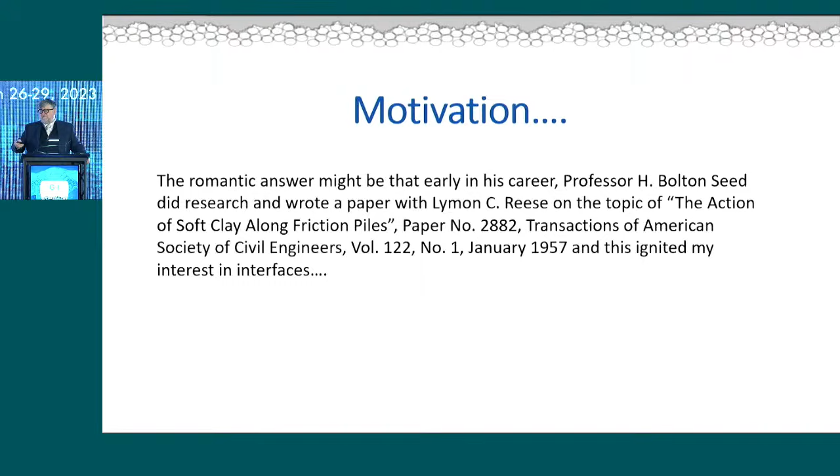But the reality is that in 1986, I took a class with Bob Holtz on geosynthetics. And that's not to say that's a second-tier opportunity, but let me explain. Bob was talking about interface friction, and in class he mentioned that at the interface you could probably get about 65% of the soil friction, which was a good number to use, referencing what was being used in practice.

Being the obnoxious graduate student, I raised my hand and said, 'Professor Holtz, what do you think the maximum we could get out of an interface was?' Bob thought for a little while, then said, 'Well, depending on a number of factors and considerations, maybe we could get 75 or 80%.' At the time, I said, thank you very much. But therein was born the question for me: why the hell can't I get 100%? If I'm an engineer, I surely should be able to get 100%.

Well, of course, there isn't a simple answer to that. Although today, if students ask me what's the most I can get out of an interface, I'll tell you, oh, probably 120%. But the problem is, if I get you 120% at the interface, the failure will move into the soil, so the maximum you can actually get is 100% of the soil. But nonetheless, there's a big difference between accepting 70% or getting 100%, and I think it's important that we stop and think about how we can achieve that.

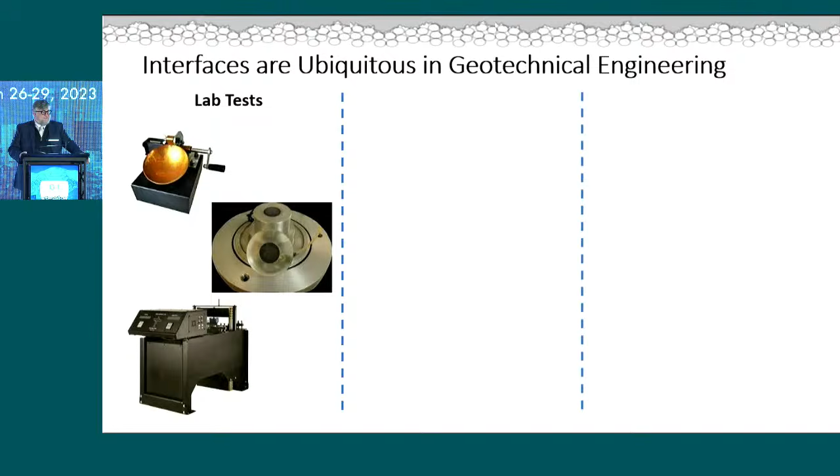If we move to the field, we have things like the cone penetrometer with a smooth sleeve, and I'm sure we'll hear a lot more about cones on Tuesday night with Paul Mayne. But also there's the Iowa borehole shear device, which was specifically designed to try and determine in situ interface friction. And finally, every time we put a soil anchor in the ground, we have to run an interface test, either proof or performance, to assess the pull-out resistance.

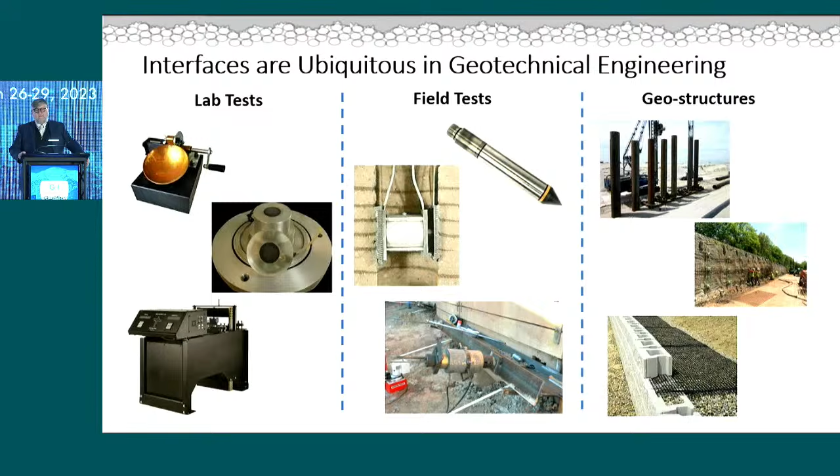And finally, geostructures - as you can see, I've got a pile foundation system, soil nails or other retaining walls, geogrid reinforced soils. All of these involve interfaces, and so it's no exaggeration to say that there isn't any geotechnical project out there that hasn't got multiple interfaces involved somewhere between the lab, the field, the lab-field test, and the actual prototype structure.

Let's move on to some specifics. If I start thinking about idealized single particle geotechnical interfaces, first here is a circular particle on a smooth surface. If you look at the dashed line in the center of the graphic, you can see there's no up or down movement of it. I'd argue that circular particle is quite compatible with the underlying flat surface.

If I go from pure rolling to pure sliding, you'll see it actually looks remarkably similar. Trust me, in the GIF, those particles on the right are not rotating, but the bottom line is there's a similarity between those two.

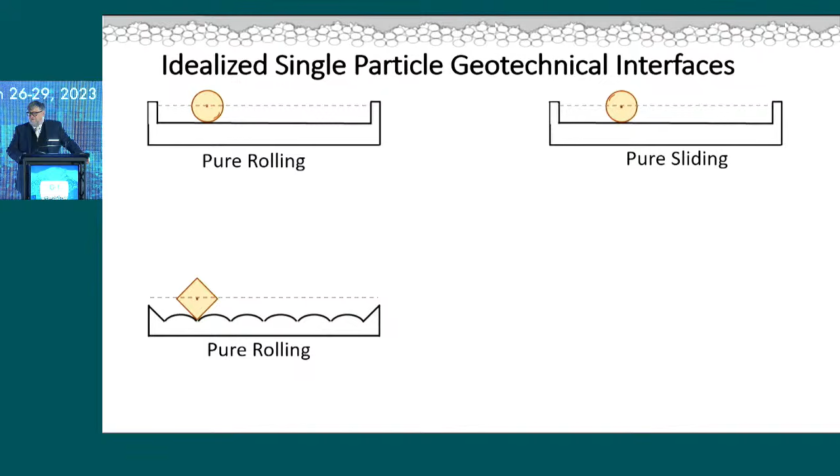If I move on to a square particle, as long as I design a surface for it to roll against—this is the pure rolling case—you can see that centroid line does not deviate up or down. So there is a degree of compatibility there. But if I go to pure sliding, now you can start to see that particle centroid line fluctuates up and down.

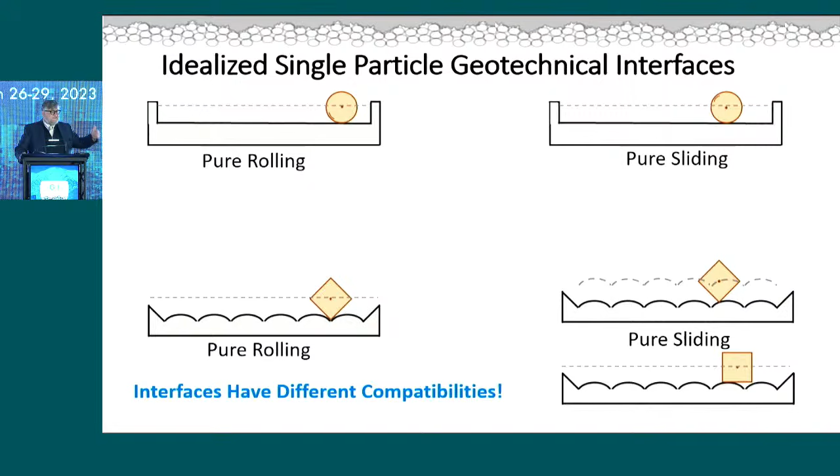However, if I rotate that particle 45 degrees, guess what? I can actually get rid of that, even though it's now a rough surface with a square particle. So the bottom line is all of those single particle idealized systems are clear evidence that interfaces have different compatibilities.

And of course, the reality is that actual geotechnical interfaces fall somewhere in the milieu of all that. There are rotations, there's rolling, there's sliding, they're moving relative to smooth surfaces, relative to textured surfaces. It is really very complex—real interfaces are much more complex than that.

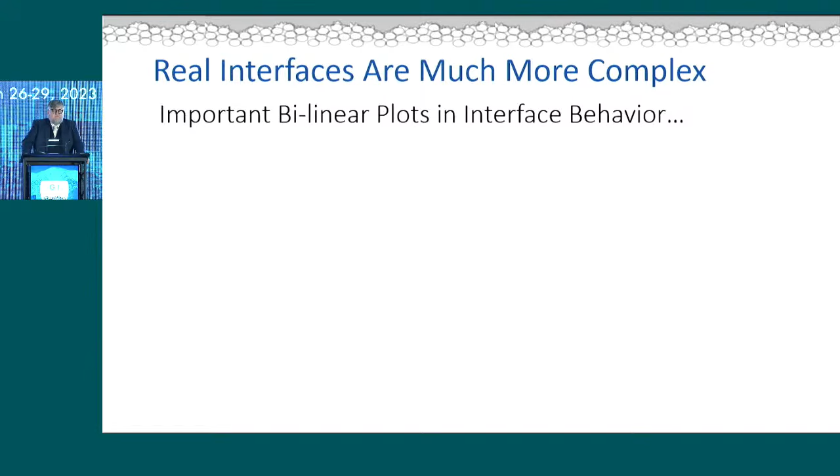There are two important bilinear plots that I always talk to students about when discussing interfaces. The first is research originally presented by Uesugi and Kishida, Japanese scholars in the mid-80s, where they plotted the relationship between coefficient of friction and surface roughness, or normalized surface roughness.

Remember, they are now looking at real systems, so the particles at the interface are not only interacting with the interface, but also with the particles right behind them. So there's a much more rich environment for things to happen.

What was important was that prior to this, interfaces were referred to qualitatively as smooth, slightly rough, and very rough. That made it difficult to extract more out of it. As soon as this was presented, it became clear that quantifying roughness of surfaces is a very important thing to do.

If you start at the left-hand edge of that line, at low normalized roughness, that corresponds to a smooth surface with particles sliding next to it. To be honest, the particles barely know they're moving relative to the smooth surface next to them—aka CPT, smooth friction sleeve. It's a slide-by test. In contrast, as you increase the roughness, you see an increase in friction as a function of normalized roughness up to some value.

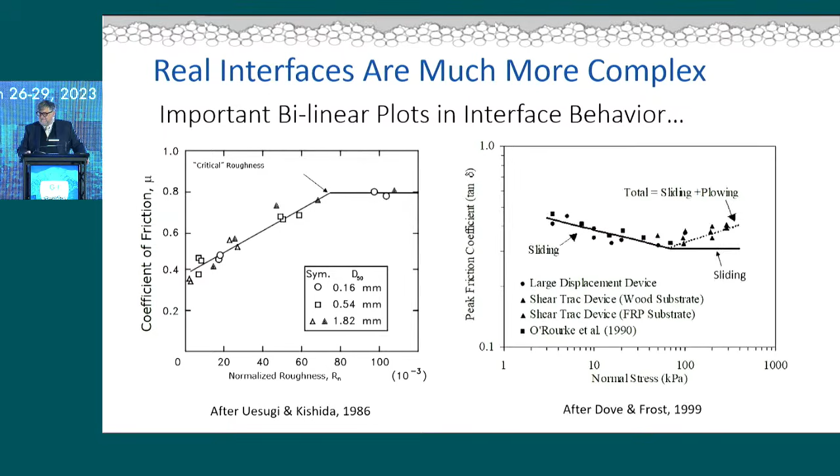At that particular value, you reach a critical roughness where the failure actually moves into the soil, because particles get trapped in the rough surface, and once it's sufficiently rough, it becomes a soil failure system. So the bottom line is, here's where I can argue I can get the 100% rather than the 60 or 65%.

The second bilinear plot, which is also very important, shows the relationship between the log of peak friction coefficient and the log of normal stress. Many of you may have seen this at various stages.

At low normal stresses, you'll have a certain value of peak friction coefficient. As you increase the normal stress, you actually see a decrease in friction, and it continues to decrease. In fact, the slope of that line gives you the exponent of the Hertzian contact law.

What's happening there is that even though the normal stress is going up, the number of particles migrating to that front row is actually increasing. So the contact stresses are going down, up to a certain stress level. Once you get beyond that stress level, one of two interesting things happens.

The right-hand end of that solid line goes horizontal, and what that means is that the front row is filled. There are no more locations for particles there, and the relative hardness of that surface is such that it remains a sliding mechanism.

However, if I have a softer surface, maybe instead of steel, for example, I have a polymer, then what starts to happen is, as I increase the stress, I'm going to find that you get plowing into the surface as your particles are moving relative to it, and if you've got an angular particle, the orientation of that plowing line may grow.

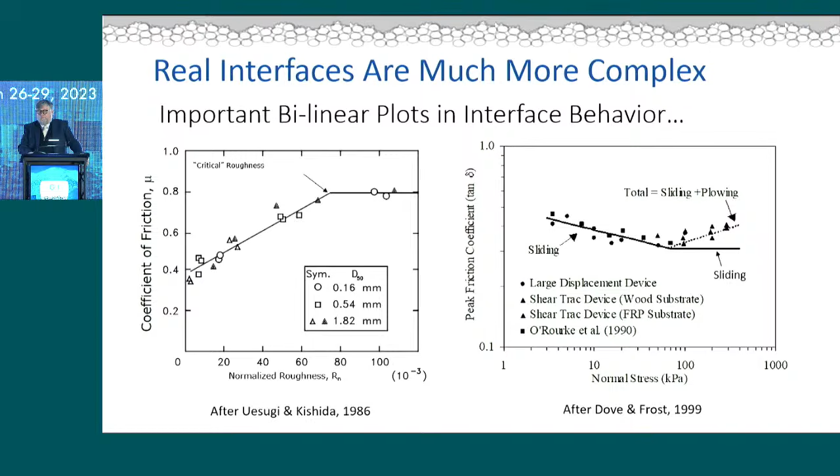So, against all of that and the motivation and the context, the lecture outline: I'm going to talk briefly about some factors enhancing or limiting compatibility. I'm going to give you brief insights from a few past studies, and then I'm going to move on and take a look at some microscale interactions using DEM, some alternative thermal interfaces using coupled FEM.

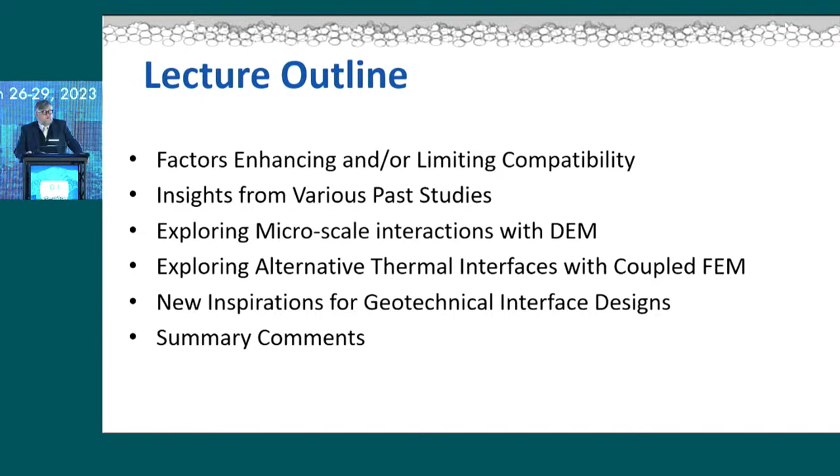Because actually one of the important things is that interfaces is not just about structural performance. Increasingly, thermal performance of interfaces is something that we need to be looking at. And then finally, I'll end up with a few examples of some ongoing and new inspirations for geotechnical interface design.

So, here is a long list of factors that enhance or limit the compatibility of two materials adjacent to each other at an interface. I am not going to talk about all of these because otherwise we'd be going for dinner just in time to get to the Terzaghi lecture, but there is a huge rich field there, and you will have additional information on this in the written version when I get to that.

However, I will say that over the years, as we've been studying interfaces, we have picked off just about every one of these through a particular study to try and understand how important that is. Some are more important, some are not so important. That's good. All are relevant.

More importantly, as I stand here today, I cannot tell you if them being more compatible or less compatible is always good. And you'll see that from some of the examples that I give. It might be nice to think that if I make it more compatible, it'll be better. But that, from an engineering point of view, may not be what we actually want to get to.

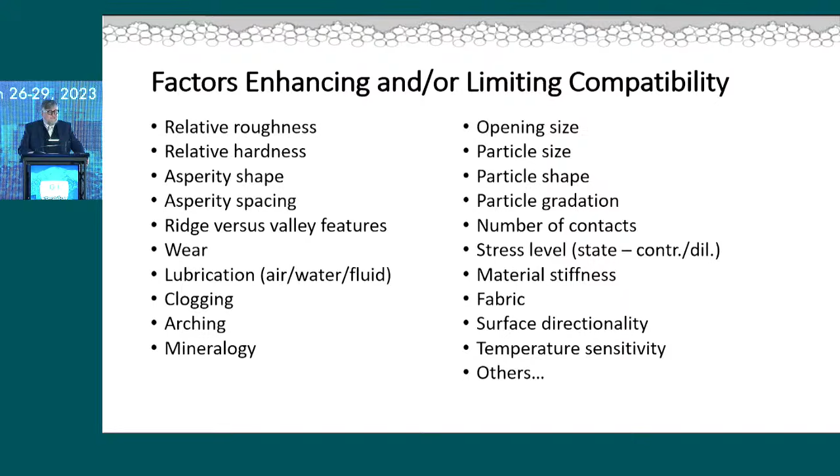So, looking at some insights, I've already mentioned the multi-friction sleeve penetrometer that we developed a number of years ago. We didn't want to fight with the CPT people, so instead we added an attachment with 4 smooth friction sleeves behind it. That was the first embodiment of the apparatus.

When we pushed it into the ground, this had 4 smooth sleeves, sequential, one above the other. But if you actually look at the friction sleeve stress versus depth, it essentially looks like there's only one line there. That's because even though it's a staged test, the fact that you had another smooth sleeve following the first one made no difference to the soil. It hadn't been affected by the first one. So whatever response you got from the first one, you got the same from the second, the third, and the fourth.

In contrast, when we put a sequence of sleeves going from smooth to sleeves with increasing roughness, now you can see that we actually generated different friction sleeve profiles versus depth.

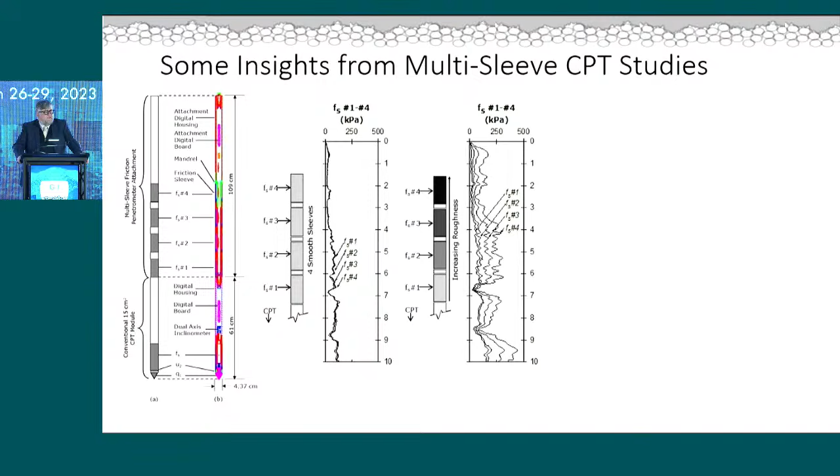I'm glossing over lots of details here, but this early work was the work of Jason DeJong's PhD, for example, and we spent many, many months looking at patterns so that we could avoid clogging, for example, with these sleeves.

Here's an image of just some of those different sleeves that we used, and you can see that there are smooth sleeves there, but there are some with textures of different magnitude or different roughness.

And in fact, we also did tests where we only put textures on a small portion of the sleeve, and no surprise, you didn't need the full-length sleeve in order to get the same measurement of friction, because the only reason the sleeve length is the length it is, is that's what was originally needed in order to have enough space to put all the electronics 50 years ago, 60 years ago.

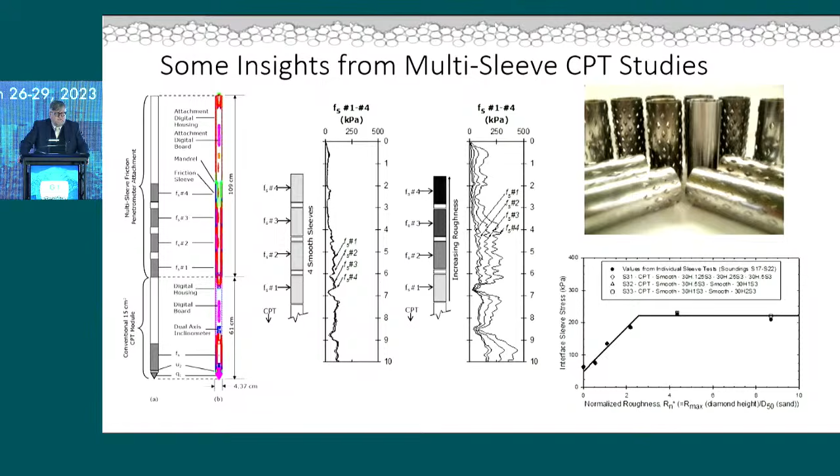So that became very useful. Probably most importantly is this was the bilinear plot that we generated, not in the lab, but in the field. And so with a single sounding, you could actually generate this bilinear relationship in the field, showing the relationship between interface friction or shear stress and normalized roughness.

Other studies we did in the lab looked at what is happening at the particle level as we move away from the surface of the sleeve. In the upper plot, the sleeve is in a vertical direction, with an image showing sand particles to the side. We made detailed measurements of the void ratio, and the line in the lower plot shows the as-prepared void ratio as a function of distance from the sleeve face. We've also plotted E-min and E-max for this particular sand for reference.

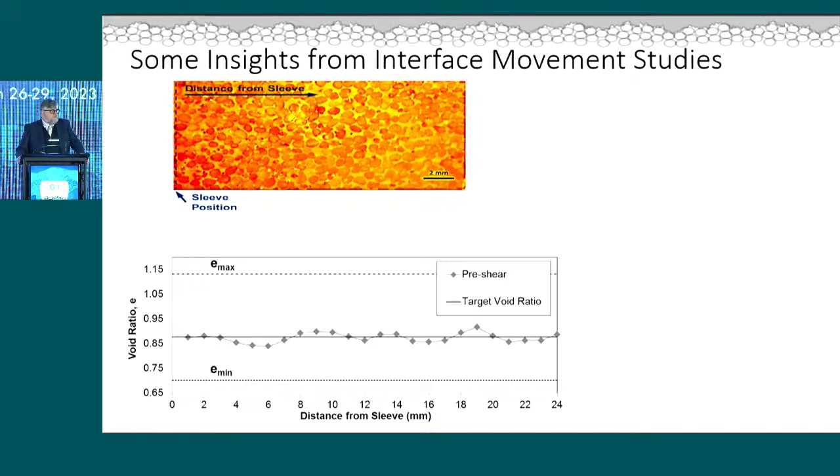This would have been a pre-shear condition. When we sheared the sand particles, this is what we found: close to the sleeve, up to about 4 millimeters, we actually had dilation. Outside that, for probably the next 4 or 5 millimeters, we had slight contraction, and then essentially we went back to the original condition. So there was this zone of initial dilation, then mild contraction, and beyond that the sand was unaware of what was happening in the system.

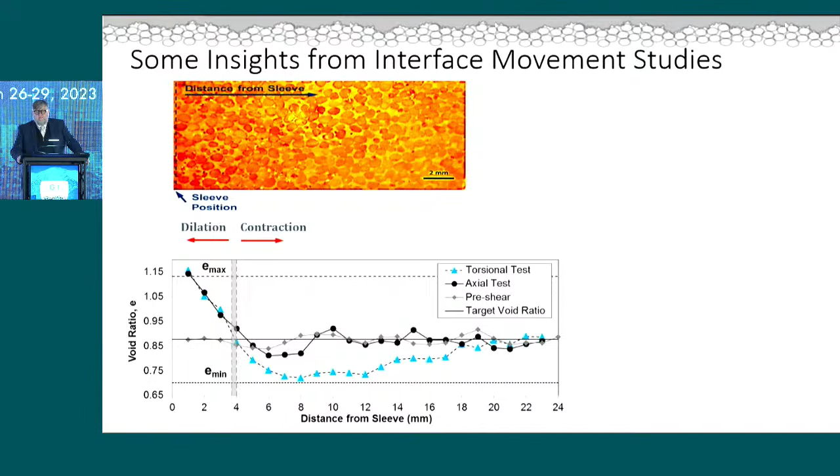When, instead of moving the sleeve axially, we rotated it torsionally, we found the blue line. The dilation was still similar in the same region, but now there was a much larger zone outside the sleeve where we were getting contraction, in fact significant contraction.

We complemented these experiments with discrete element modeling - this was the PhD work of Alejandro Martinez. The particle movements, depending on whether you're moving the sleeve axially or torsionally, are completely different. In one case they stay very close to the sleeve, whereas in the other they're thrown off in tangential directions, which has an effect on performance.

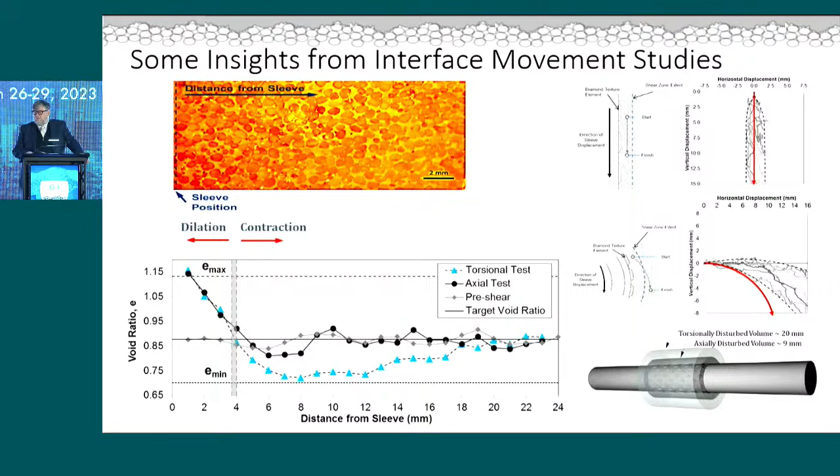It also has opportunity. If you think about the implications, for example for piles, based on the installation method you may be able to get superior performance. Finally, this graphic shows the relative differences in the volume of soil involved for the same sleeve, the same sand, just by changing the direction of relative movement.

We've also done work with shear bands, and you might ask why shear bands, aren't we talking about interfaces? Well, a shear band is actually two interfaces back to back with the same material properties on both sides of the interface. In a biaxial shear test, we captured specimens.

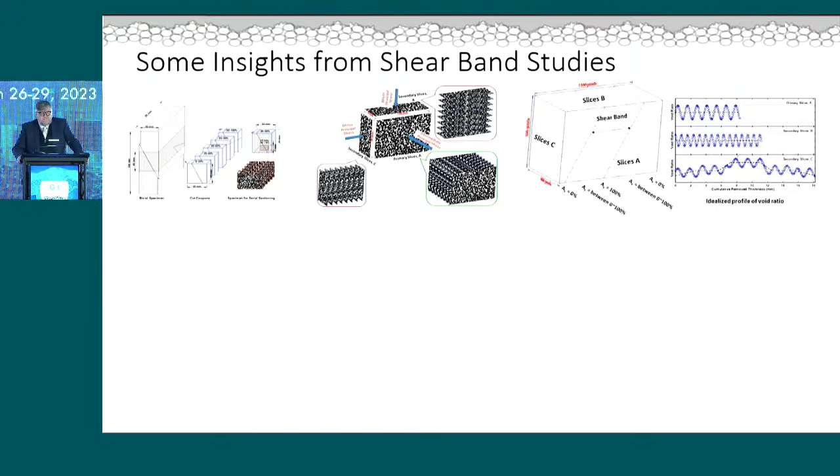We then used resin impregnation and image processing to generate slices from the specimens we captured. We had this concept that depending on where we captured the slices relative to a particular cube - I'm showing a schematic with a shear band diagonally across it - for surfaces on what I call the A or B faces, the front face or the top face, there's always the same proportion of soil within the shear band as well as outside it. So while I may get some local fluctuations in void ratio in the slices, I shouldn't see much difference.

In contrast, for the C slices, if I start at one end and slice through it, there clearly seems to be some kind of signature, because the percentage of those slices that are initially not in a shear band, then partially, then fully, then partially, then not in a shear band, varies as you go from one end of the specimen to the other.

Here are the results, for an unsheared biaxial specimen. While there's a little fluctuation in the early part of the A sample, the rest essentially fluctuate above and below the median line, as we had hypothesized. I also put to scale the circle showing the particle size used here. One thing that emerged was the recognition that if you have a relatively uniform sand, the void ratio structure that emerges, even over a large representative volume, is going to be influenced by the presence of those particles and their diameters.

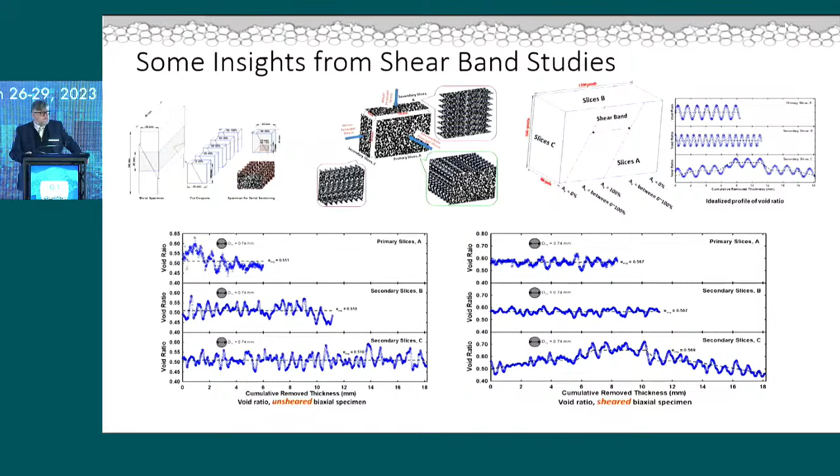We repeated the exercise for a sand sample after shearing, and while there's obviously more natural fluctuation, the results actually mirror the hypothesis we had shown. The bottom line is that this showed us how there are other measures of what's happening adjacent to or in shear bands that are important for us to take advantage of.

Moving on to geosynthetics interface testing - again there were multiple PhDs who did work over the years, so I'm just going to show a couple. This is three different geomembranes and the same geotextile.

Everything else was the same, the normal stress, everything else. I've referenced these as smooth, slightly textured, and moderately to heavily textured geomembranes. You can see that the backbones, the curves, the initial early parts of the curves mirror each other, but there's a different peak strength and a different post-peak response as a function of the texturing of the geomembrane.

In contrast, if I use the same geomembrane, and I don't mean repeat test, I'm still using virgin geomembranes, but of the same geomembrane and a different geotextile, now you can see there's a big difference both in the peak strength and in the strain or displacement at peak strength. So again, there's an important relationship on the other side. It's not just about the roughness of the geomembrane, it's also about the unit weight of the geotextile, how thick the geotextile is, and so on.

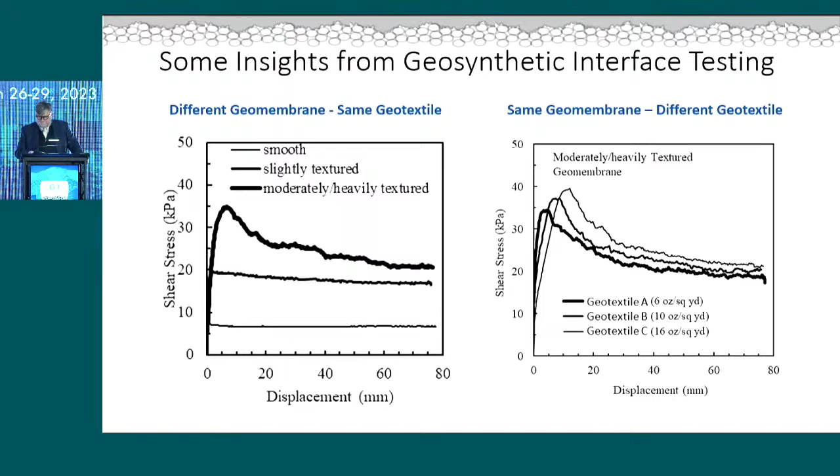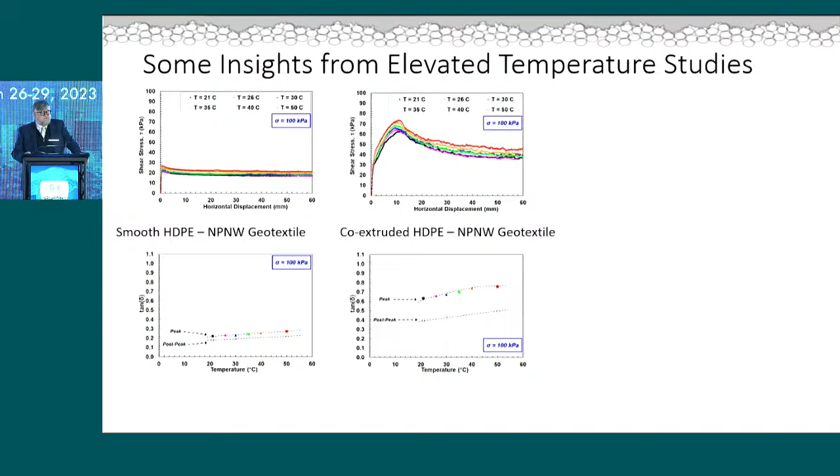Lastly, with respect to geomembranes, we've done a lot of testing at elevated temperatures, because a lot of times we only test at room temperature in the lab, but then we put these into liners in landfills where the temperature may go up to 65 degrees, so we were interested in the effect of that. We did it with many different types of geomembranes, typically against a needle punch non-woven geotextile. The one on the left is smooth, the one in the middle is co-extruded, and the one on the right is structured HDPE. Other than that, everything in all these tests was similar, and you can see there are dramatically different stress-strain curves for those interfaces.

The other thing that's quite fascinating is that if you look at the post-peak portions of the structured HDPE, you can actually see a periodicity emerge. That's reflecting the actual interactions between, for example, the spikes on that structured geomembrane and the geotextile.

One of the nice things about testing geotextiles is that you see the same behavior as you do with sands, but it's actually much nicer because, first of all, the particles are the same diameter, maybe 35 micron filaments, and they're long, but you have many more contacts, many more points of contact as well. So you actually get much richer, much nicer curves when you do those tests.

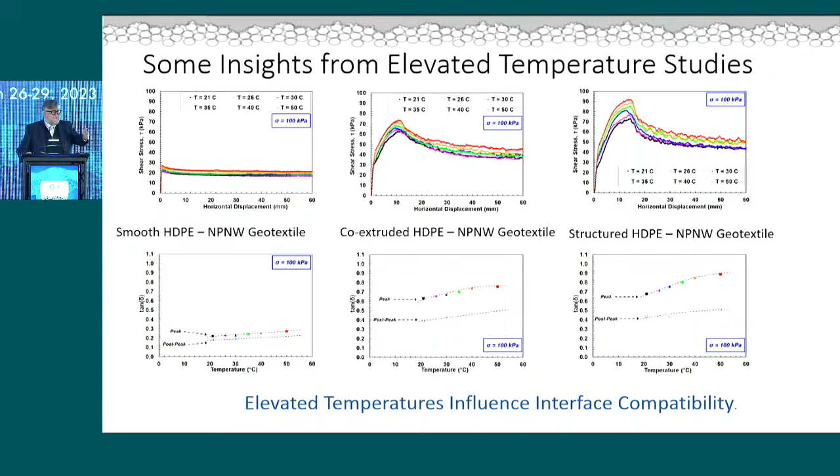So again, I'll make the argument that elevated temperatures influence the interface compatibility. Now, the good news here was that with higher temperature, you're getting higher strength. So you don't need to worry about the landfill you designed with a friction value based on room temperature. I'm not making any comment about what happens if you put the liner in Canada and haven't tested it at 0 degrees.

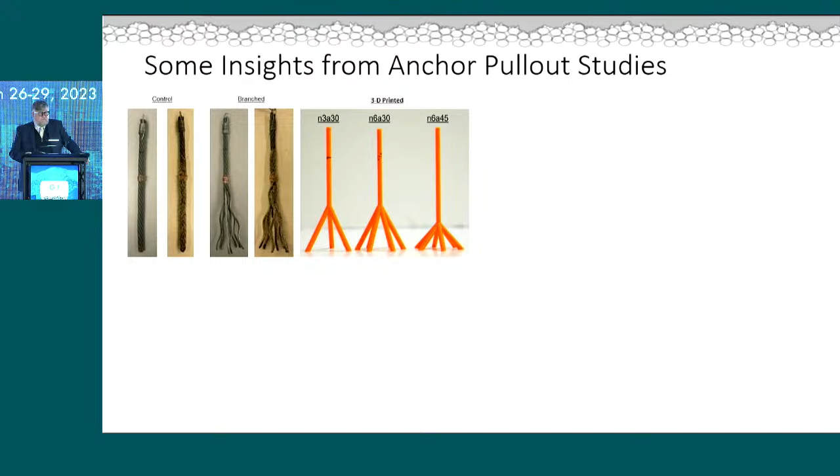We also have done studies looking at anchors and pull-out studies. We looked at both fairly rudimentary control and branched, but then we started 3D printing branches as well. We did pull-out tests both at lab scale but also in a CT so that we could actually see what was happening around the specimens.

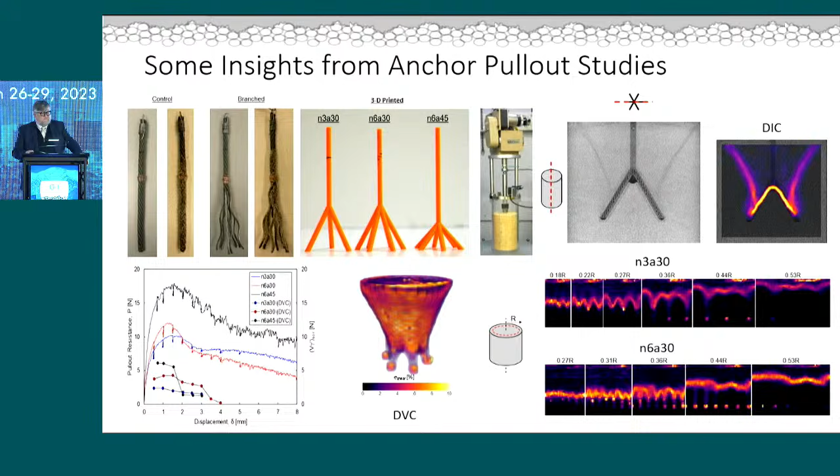One of the reasons I wanted to show this is that by looking at those images from the DVC, represented in the plots in the lower right here, the upper one is a 3-branch at 30 degree, and the lower one is a 6-branch at 30 degree. You can actually see how arching varies as you go from the near radius to the further out radius. So arching is an important factor in interfaces that we need to take care of.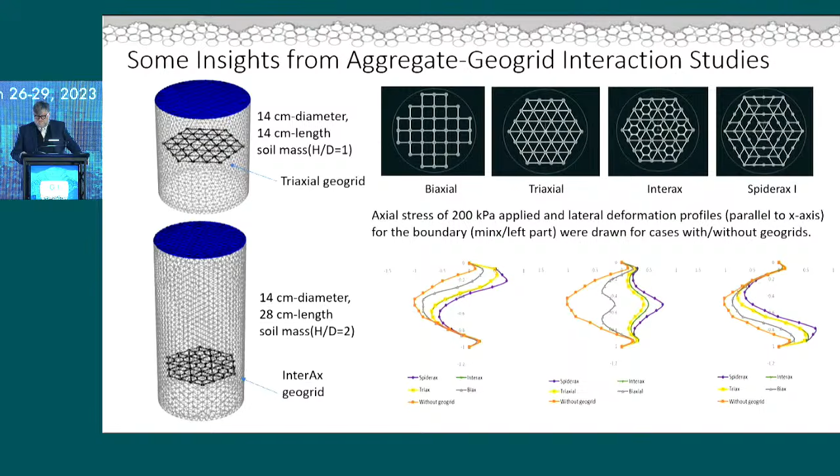Whereas the others show the different geogrids and the different relative performance. The important thing here is that keeping everything else the same but changing the geogrid, you're going to get a different interface friction response in this system, and I think we need to pay more attention to what we're doing there.

So then, as a result of that, I'm just going to spend a few minutes looking at some what I'll call microscale aggregate geogrid interactions. So this is a schematic of work that we've been doing. Rod Barela is the PhD who's been doing that. By the way, I should have mentioned the previous geogrid work was done by several students, Andres Peralta and Janda Schoner. So many of them are in the audience, and I wouldn't be up here with the opportunity to present this wonderful research without their help.

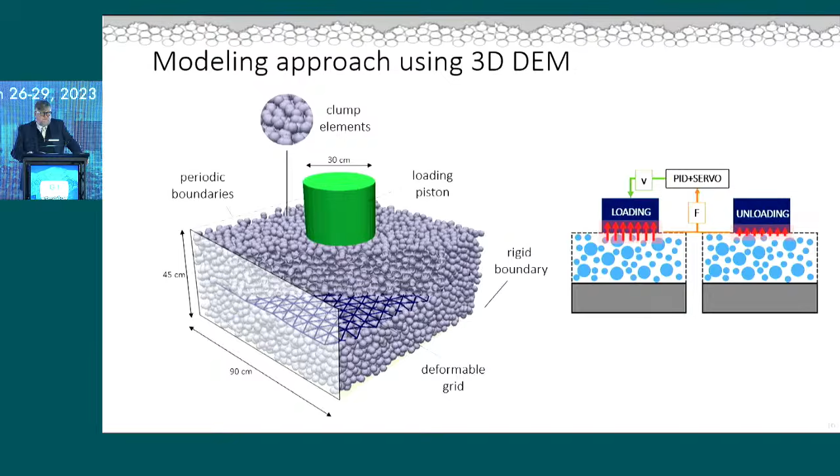In this particular case, we were doing 3D clumps using YADE. You can see the geogrid in the middle of the specimen there, and we did cyclic loading of the specimen. For the part that I want to present to you today, we looked at 3 different configurations. On the left is a sample that is unreinforced, and the concept was that would be likely the one that would give us the largest rutting or the maximum deformations in the system and so on.

In the middle, we have maybe what I might call a conventional geogrid situation where, irrespective of whatever the in-plan structure the geogrid is, that's what we're currently using. And then on the right was a very interesting approach that Rod came up with, which was to actually, within the DEM, restrict lateral translation of the particles in a certain zone. That was intended to sort of give you a lower bound to what deformation you might still expect to see. You couldn't get less than that.

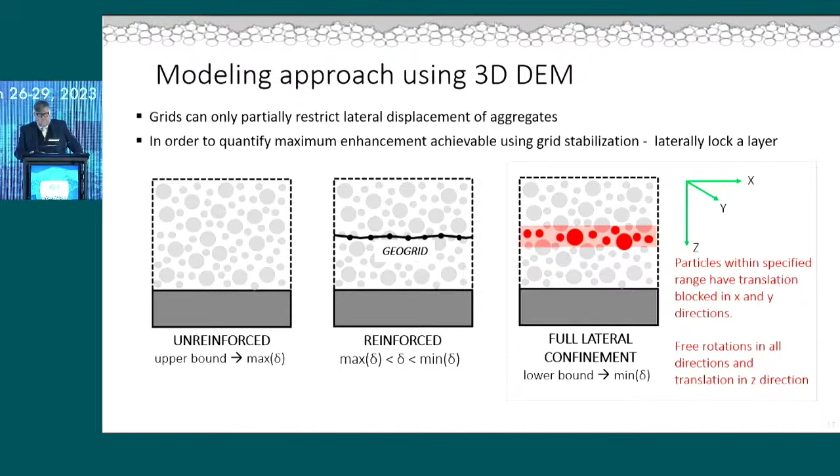And so we did simulations with all of those. Here are the DEM force chains. On the left, you can see the unreinforced, and for those of you who use a 2-to-1 stress distribution, that might give you a little bit of comfort. But you can see that in the middle, where the presence of the geogrid is obvious there, you can clearly see how there's a pinching in of the deformations there.

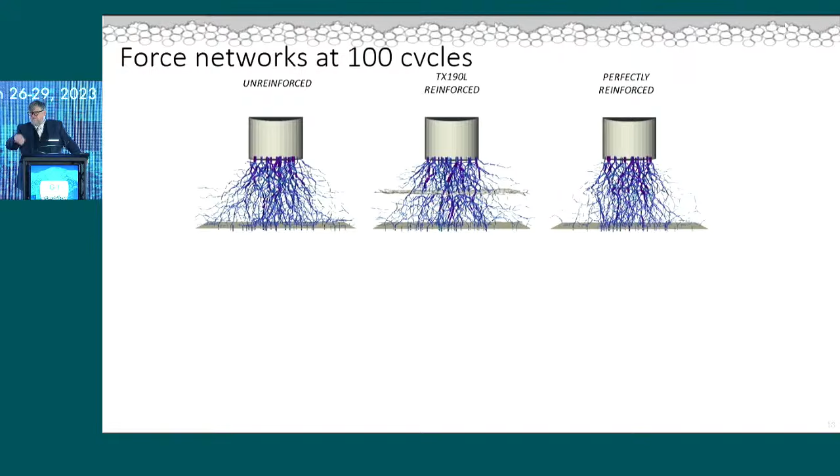Now remember, in all these cases, you're not restricting vertical deformation. What you're doing is trying to provide lateral confinement at a particular elevation. And then on the right is the one that we would call perfectly reinforced. Again, we're not restricting vertical deformation, so that's why you still see force chains below where that zone was, but that becomes important.

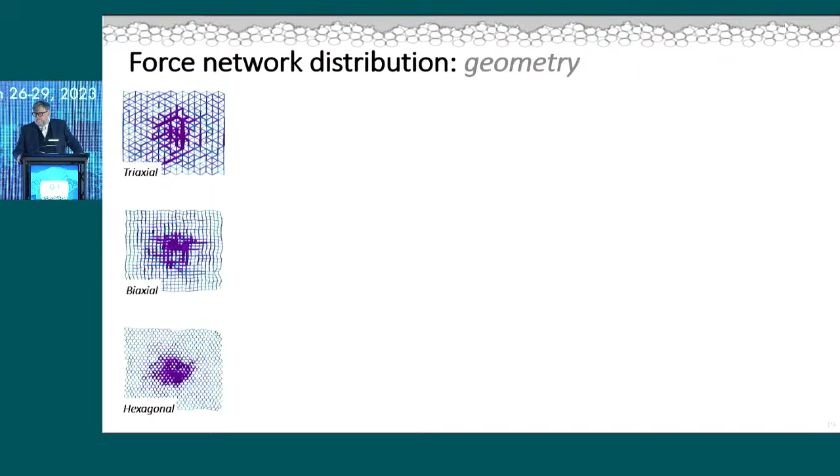We looked also at things like the force network distribution. In this example, there are 3 different geogrid geometries: the upper one is triaxial, the middle one is biaxial, and the lower one is hexagonal. You can see that the darkened color areas in the middle are reflecting the forces in those various grids within the system.

If I just determine the normalized rib axial force, in other words the force perpendicular to the loading, these are the values I get. This plot shows those forces as a function of distance from the center. Right at the center you've got the higher forces, and as you move toward the periphery of the sample, the forces essentially diminish to close to zero.

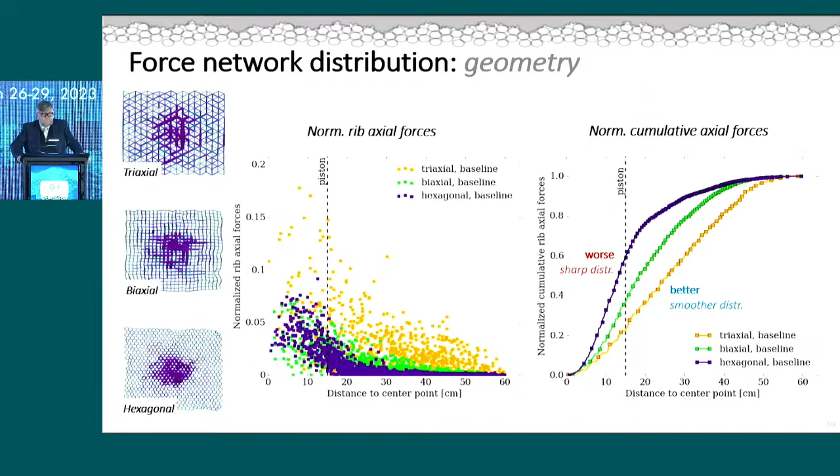If instead of plotting those as individual values I plot them as cumulative force plots, you can see that blue is the hexagonal, green is the biaxial, and orange is the triaxial. Just changing the structure of the grid, with everything else exactly the same, gives a much different response. With the triaxial, I'm getting a much greater distribution of the radial forces away from the point of application - in other words, it's involving more of the geogrid in absorbing the energy being put into the system.

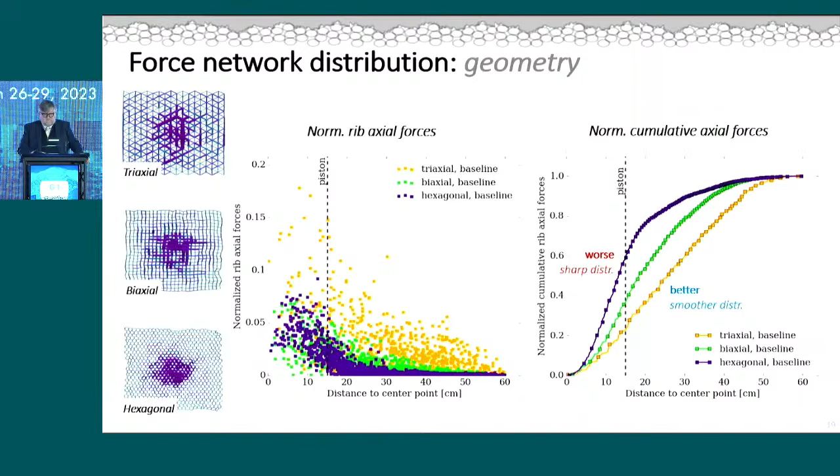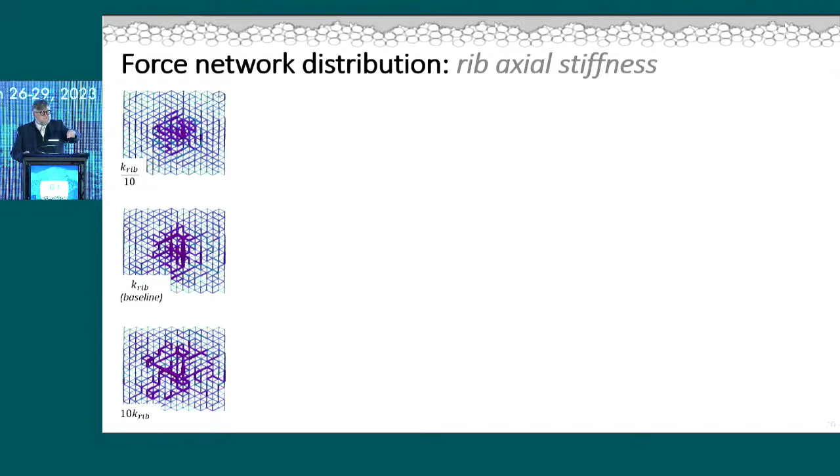Similarly, we looked at the rib axial stiffness. In the last case the stiffnesses were the same, but we changed the geometry. In this case we're looking at rib axial stiffness, and we did not change the geogrid - these are all a triaxial geogrid. This is the individual rib axial force plot, and this is the normalized cumulative axial force plot. Again, you can see that while there is still some influence, it's not anything like the amount of influence. Here we changed the ribs from 1/10 baseline to 10 times baseline, so a large range of stiffnesses was looked at.

So as you're thinking about what properties to put into your geogrid, you may well, at least on the basis of this, want to be looking more at the geometry rather than the stiffness of the ribs.

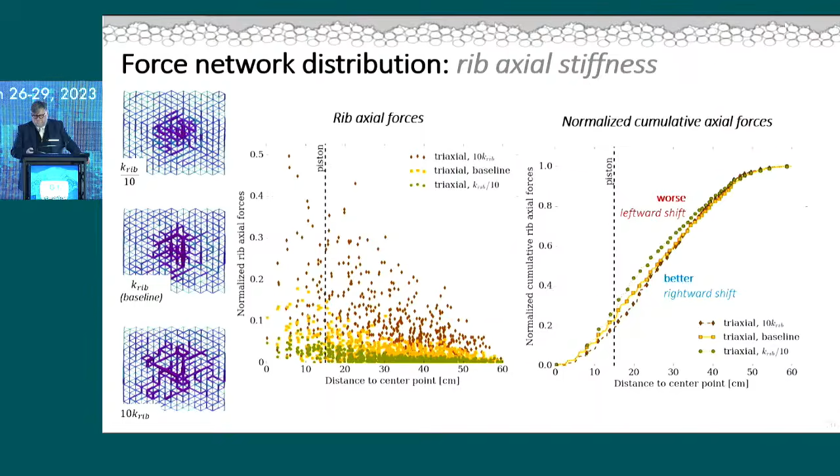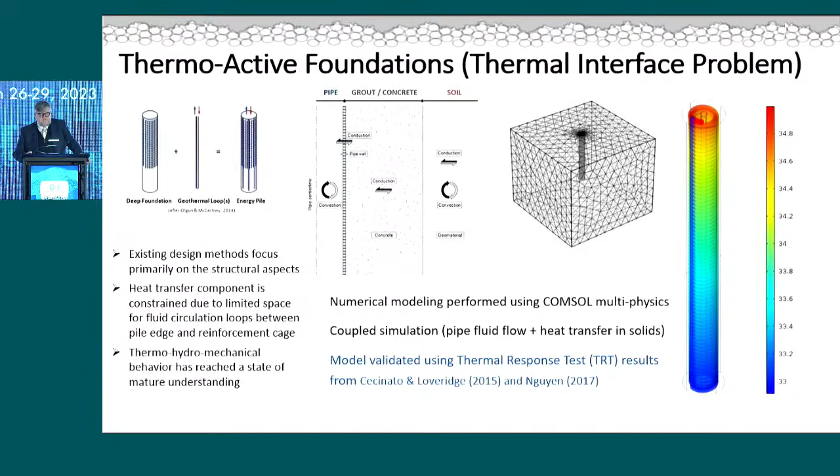This was the PhD work of Victor Attalay, who's also in the crowd here. We validated our model using thermal response test results from the researchers shown at the bottom. But this was where we said, well, so what could we do differently?

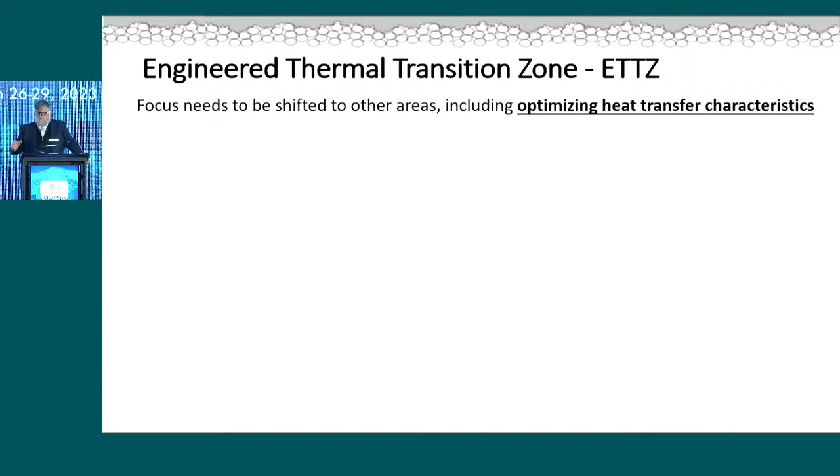So we came up with the concept of an engineered thermal transition zone. The idea was: let's not focus on the performance of existing systems, but is there a new system out there we could introduce and do better with? This is a plan view across a structural pile in the center, shown in blue. We're calling it an engineered thermal transition zone around that, and then we have the surrounding geomaterial - that pink area. Our goal was to augment the thermal properties of that zone so we can get more out of the same pile system.

There are some other factors of interest to us. For example, when you start adding fluid loops inside a concrete pile that's got lots of structural steel, it gets busy - you're impinging on the structural neighborhood. So part of our concept was: are there other ways we can change the circulation loop systems?

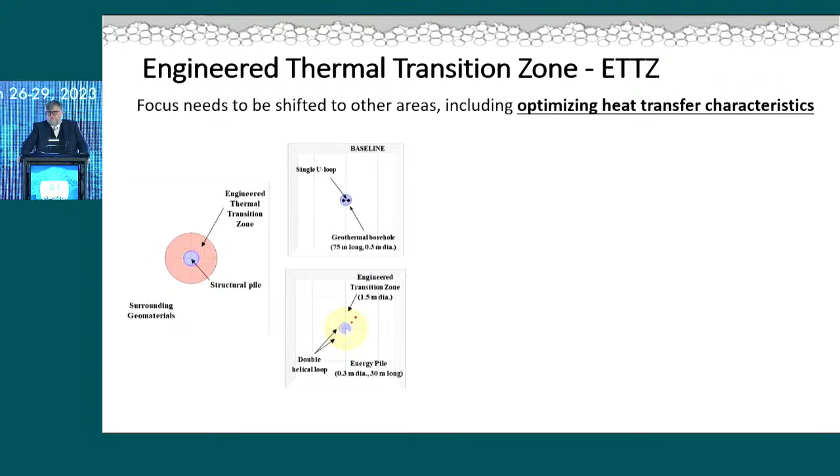In this study, still part of the numerical work, we looked at two configurations. One was the baseline - a 75-meter long conventional heat exchange pile with a single U-loop. In the other, we used an engineered transition zone, and instead of putting the loop inside the concrete pile, we actually used a spiral loop inside the engineered transition zone.

When we did the COMSOL simulations, here are the results. The lower blue line shows the power extracted with the single loop system in a 75-meter long pile. The orange line shows what we extracted with the spiral loop in the engineered transition zone, but only for a 30-meter long pile. So we actually reduced the length of the pile by more than 50%.

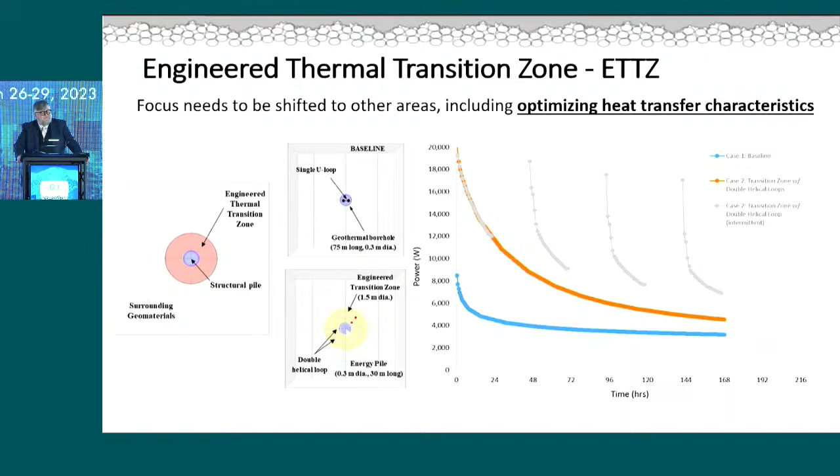Finally, the gray lines show what happens if you run the system on an intermittent basis: turn it on for 24 hours, turn it off for 24 hours, allowing the thermal zone to recover. Just like we learned from our friends doing pump and treat in the environmental world, there are often benefits to not running the system 24/7, 365, but rather using it intermittently.

We did lab testing as well, and this is a schematic and photos of the lab work. Here are plots from the actual lab experiments. The blue line is our baseline, and the other versions are either the baseline with an ETZ, or a spiral loop with no ETZ. The green line, which allowed us to extract the most power, is a helical tube with an ETZ.

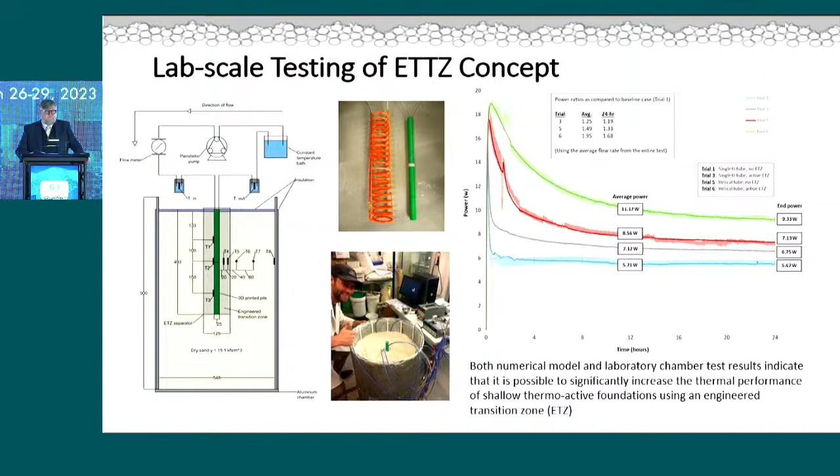The bottom line is that all the results we've generated so far, both the model and the chamber tests, show we can do much better with heat exchange piles if we start to be creative and think about whether there's a transition zone and an opportunity to do something with that.

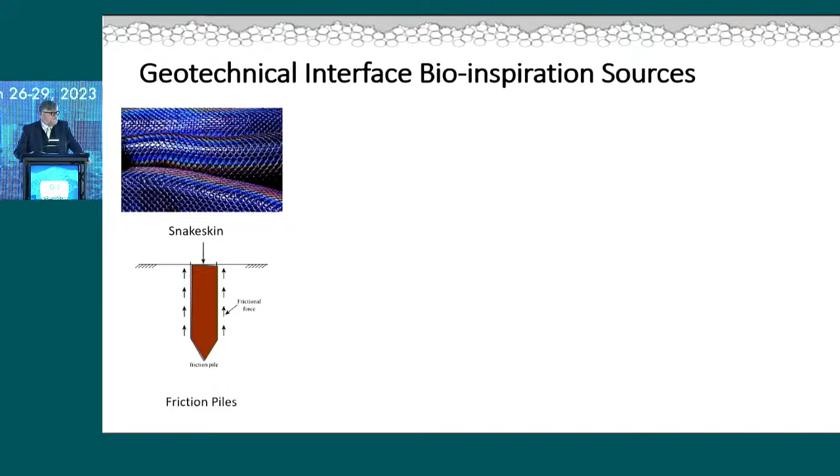So, new inspiration for geotechnical interface designs. It should not come as a surprise that I'm going to show some bio-inspired ideas. One might be snakeskin on piles. One might be tree roots for ground anchors. One might be spider webs for geogrids. And one might be bamboo stems for thermal exchange systems.

The other thing I think is very important is that we need to stop and think. Typically we approach interfaces by grabbing a piece of steel from my friend the structural engineer, beating it into the ground, and accepting whatever interface that generates. I'm not picking on steel—it could just as easily be concrete or timber or whatever else. But we don't actually think much about the interface as we put it in.

I think as we move forward, it's going to be important that we think about interfaces from several perspectives. One, is it a preformed interface? If it's preformed, I have the luxury of forming interfaces in factories, in labs, wherever, where I can control the properties to a certain design value.

A term I've not heard used before: in situ formed interfaces. Placing geogrid in soil, then putting more soil on top and compacting it—that's an in situ formed interface. There's an opportunity to take advantage of that, not just doing design based on somebody's gradation that they give you and accepting it, but thinking about both of the materials that will ultimately be at that interface you're forming in situ.

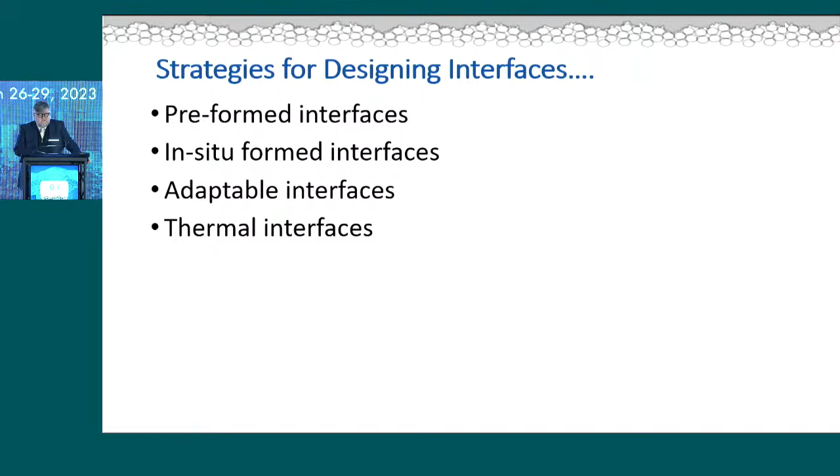The third category is what I'd call adaptable interfaces. Maybe we can start off with something, but then change its configuration in situ so it's adapted to get different performance. Finally, I'd be remiss if I didn't also talk about thermal interfaces again, because we tend to just think about interfaces as structural systems, but there's lots of opportunity associated with thermal interfaces nowadays.

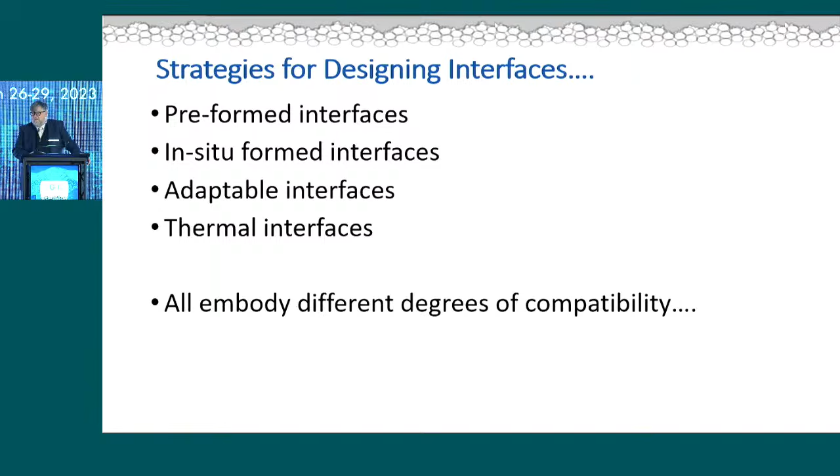The important thing too is that all of these different types of systems embody different degrees of compatibility. So quickly, pre-formed interfaces—this is work that Alejandro Martinez and his research group at Davis is doing.

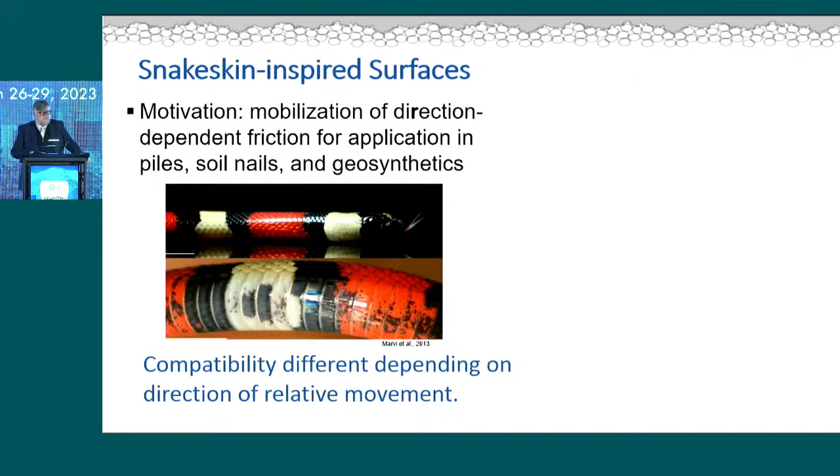Alejandro and I spent many years while he was a PhD student talking about textures and various things like that. He's been doing exciting work where he recognized that the directionality of something like snakeskin can be very important—you can have one interface friction if you're inserting, and a different interface friction if you're trying to pull out. There are many applications where that can matter, not just in piles, but in soil nails and geosynthetics.

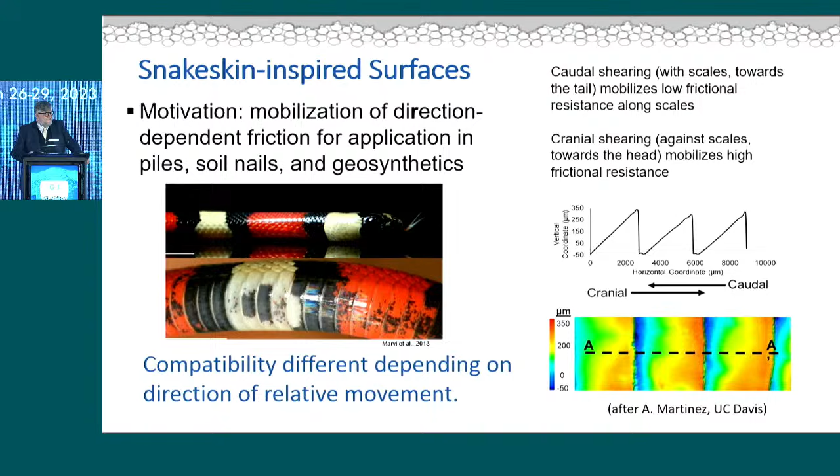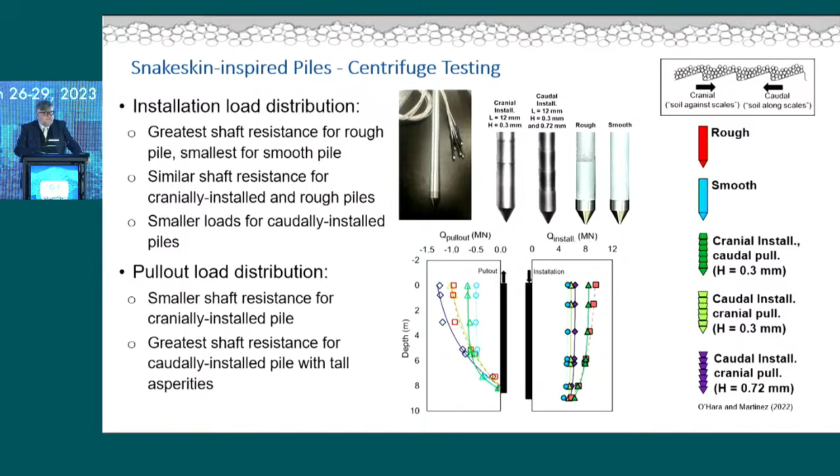To do that, he actually got cadaver snakes and measured their surface properties—this is just some of his results. Most recently, he's been doing centrifuge tests, installing model piles with different roughnesses: conventional rough, smooth, and with textures both cranial and caudal, then comparing the pull-out forces and installation forces. The bottom line is there's clearly a huge opportunity to reduce the effort to install a pile but get a higher capacity once it's in performance.

In situ formed interfaces—we've already looked at these a little, but I want to reinforce some of the later work. Again, this is a family of geogrids, and typically we see white geogrids on a black background or black geogrids on a white background. However, when I color code them, information jumps out immediately. You can see how, for example, in the biaxial, all the openings are the same size. Likewise the triaxial, all the openings are the same size. However, Interax, in my opinion, represented a massive step forward because there are openings of 3 different sizes. And finally, our Spiderax has also got multiple sizes.

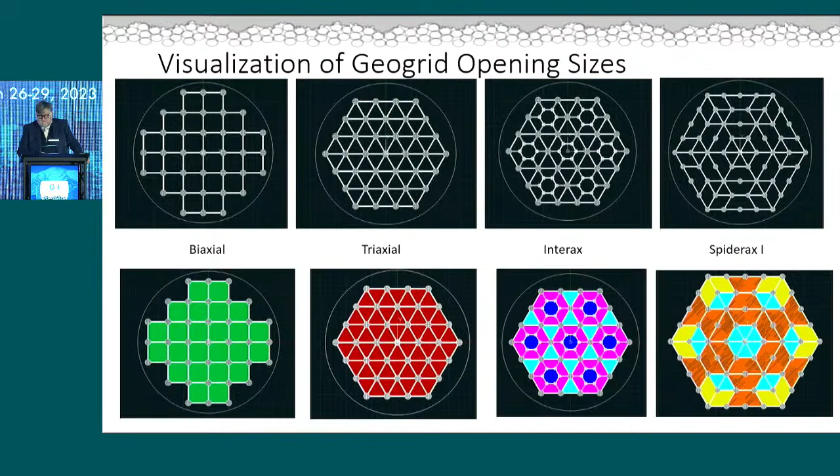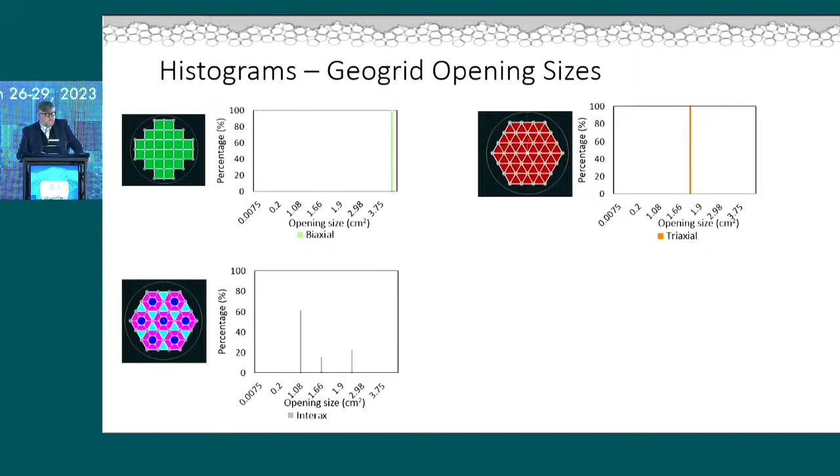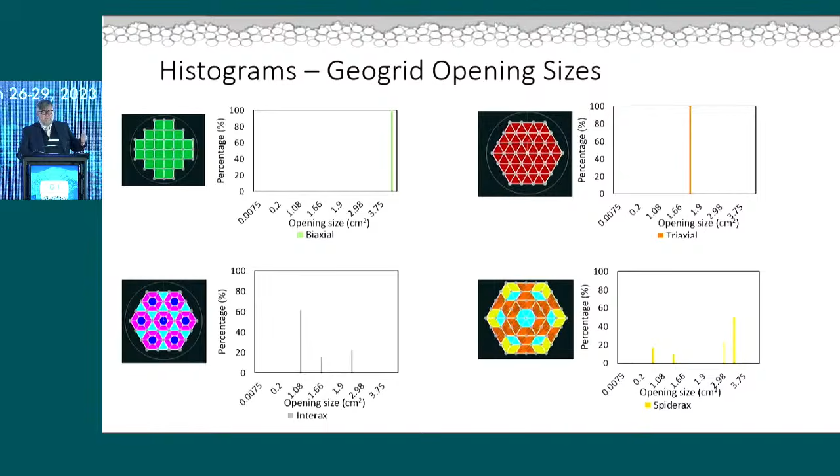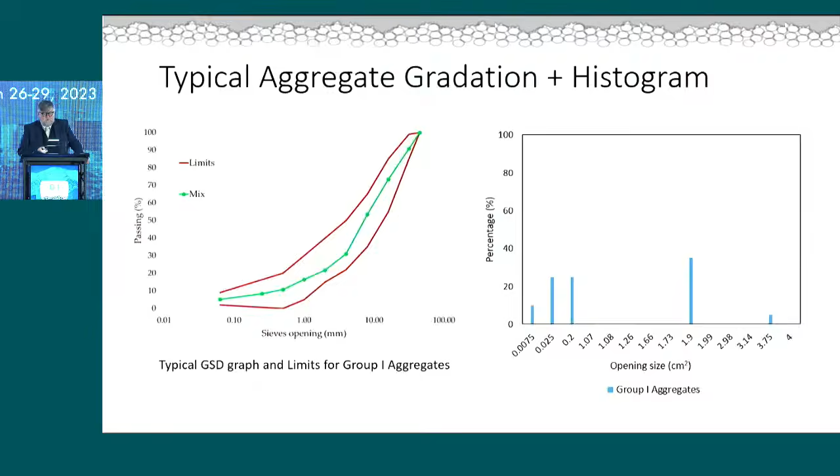But there's another important thing, because remember, we're talking here today not about geogrid design, we're talking about interfaces. A lot of times we install these—here's a typical gradation with limits your client might give you, saying here's the soil we're using, reinforce it or install geogrids to improve performance. To simplify that, I've drawn the histogram in bins for that material, shown on the right-hand side. Importantly, if I merge all of them together, my question is: which combination of geogrid—upper or lower left, or upper or lower right—is going to work best with the aggregate? We're locked into some of these gradations, but we're not recognizing that interfaces are a 2-party business, and we need to think much more about which are more compatible.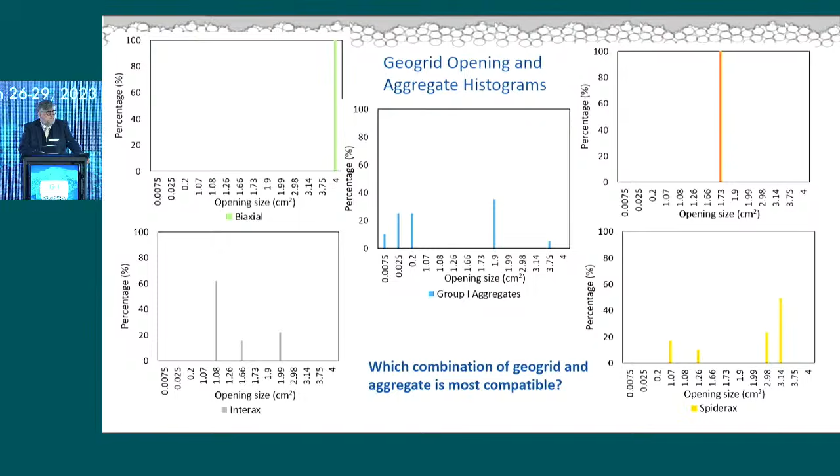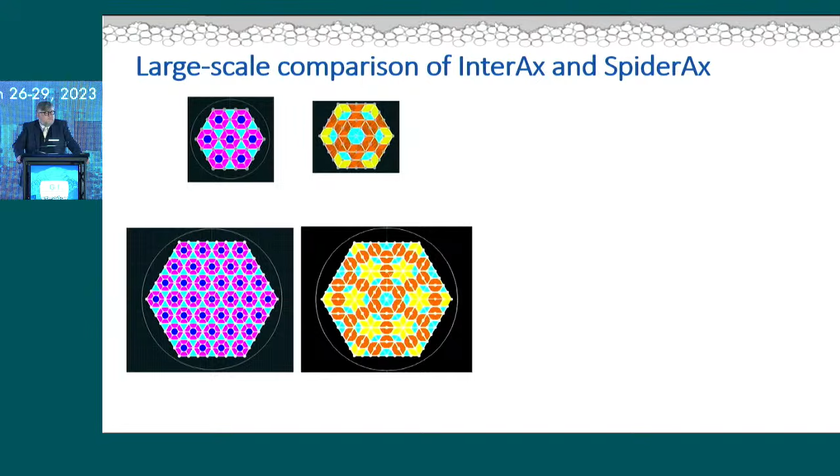But if you look at the one on the right, comparing the middle upper plot with the middle lower plot, there's a secondary structure starting to emerge once I look at the larger geogrid. As soon as you realize that, you think, I should have thought of that before—think about our friends in the steel business who make trusses. They don't make them out of one size steel truss; they use multiples with different configurations. They understand it, and they're not even trying to get it to work with soil. We have a much harder job because we're actually trying to get it to work with soil.

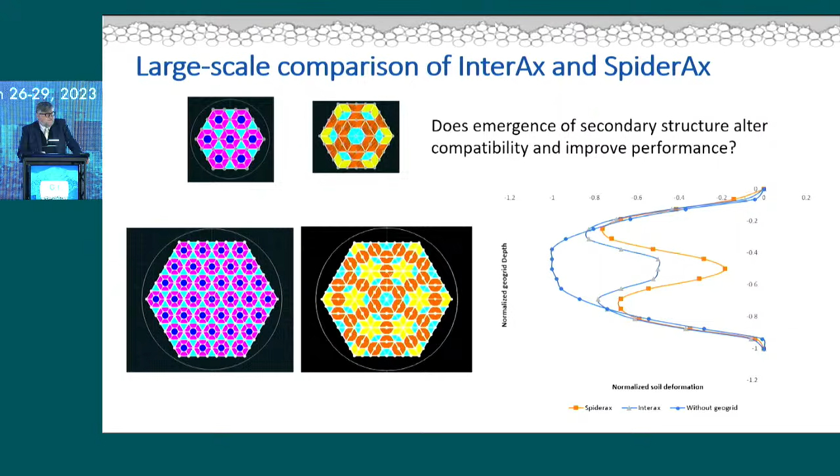So this is just to show, again, some of the deformations. My question—and this is something Jandash hears from me on a weekly basis—is: does the emergence of a secondary structure alter the compatibility and improve performance?

Finally, adaptable surfaces. We've got a lot of work we're doing with root-inspired ground anchors. And of course, when we started, the big question was: that's nice, you've got these 3D printed ones, but how do you get those into the ground?

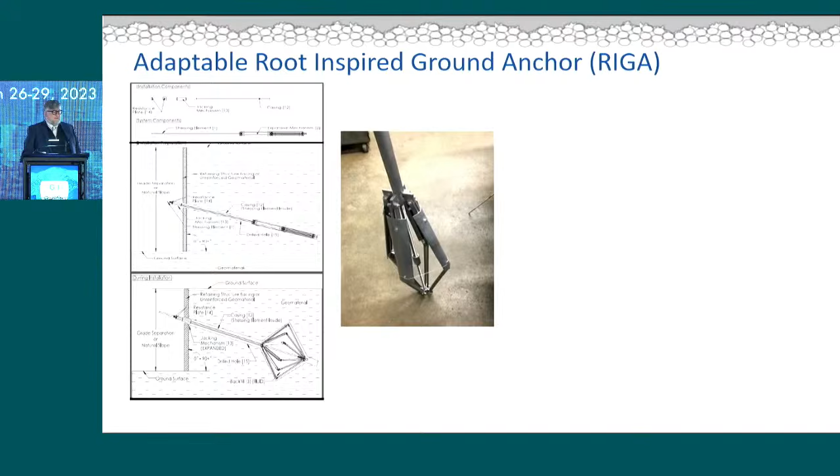Well, that's why you hire incredible graduate students who come up with great ideas. This is the PhD work of John Huntoon, whose only shortcoming in life, by the way, is that he's an Oregon State Beaver, so we had to re-educate him into a lot of things once he came to Georgia Tech.

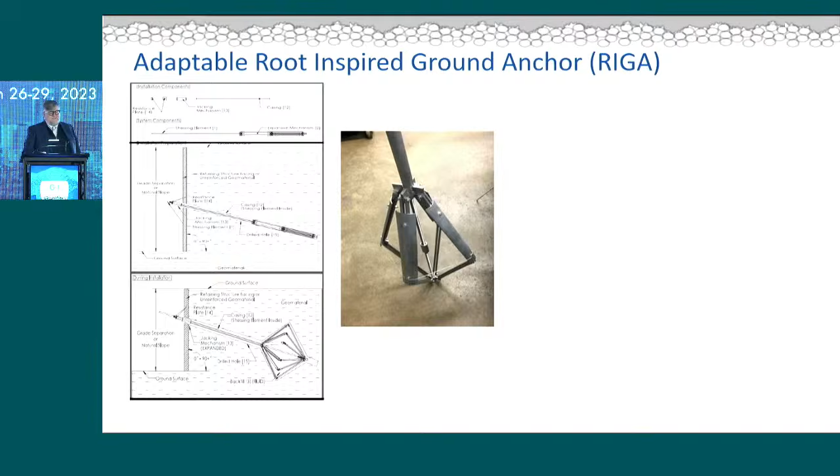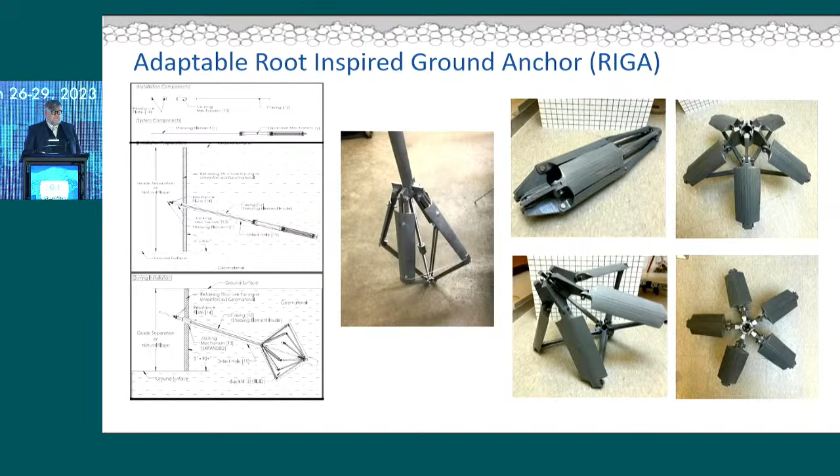This was an initial model that John made, and then here's the 3D printed version. When it gets launched into the ground, it goes in an enclosed fashion. Once it's in place, we can expand it out, and this particular one has 5 branches.

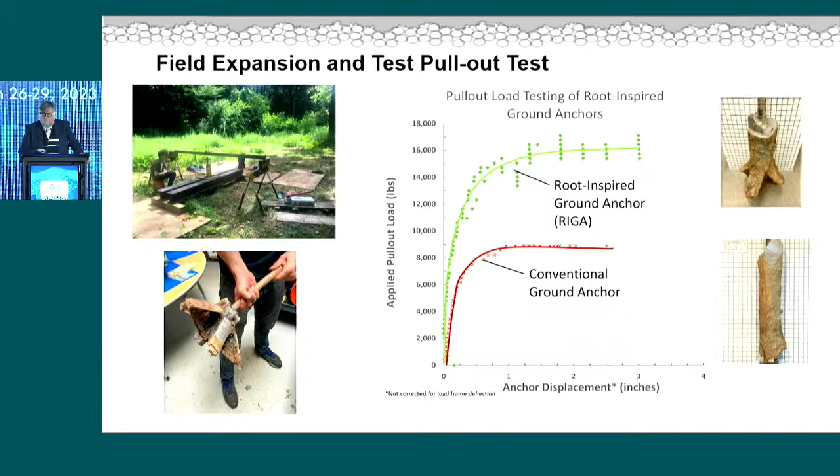And finally, the bio-ETZ piles. Again, we've looked at this engineered transition zone before. One of the nice things about revisiting this transition zone is we can actually separate the thermal and structural components. In some cases, we may want a deeper structural component that can go down to bedrock, but we don't need to go all the way to bedrock with the thermal component.

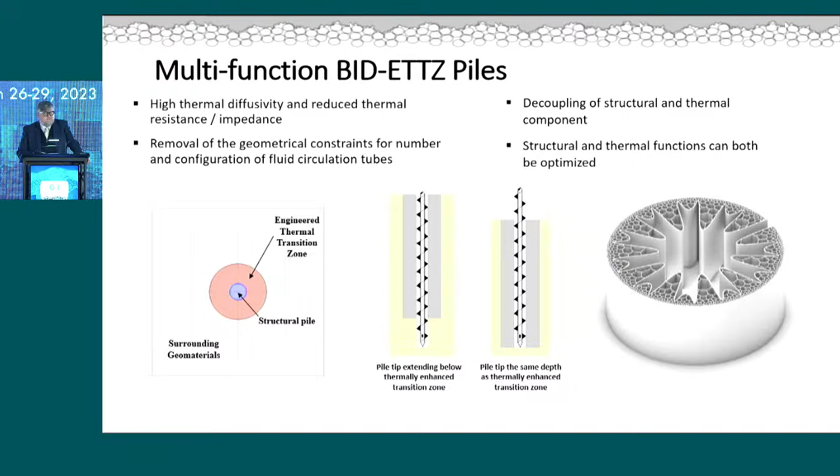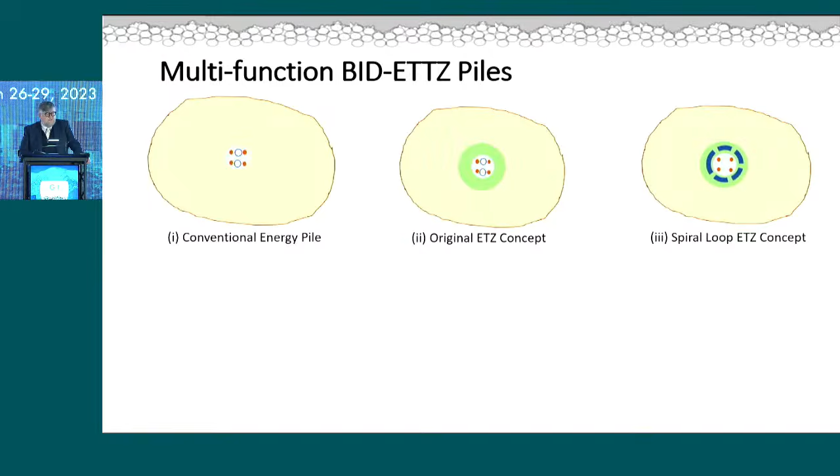What we're starting to look at are these new structures that are bio-inspired, where instead of using augmented soil, we can perhaps use some of these bio-inspired structures. Here are some of the conventional ETZ piles that we've already studied, and here are some of the configurations that we're now looking at. We're able to play with the structural capacity and the thermal capacity separately.

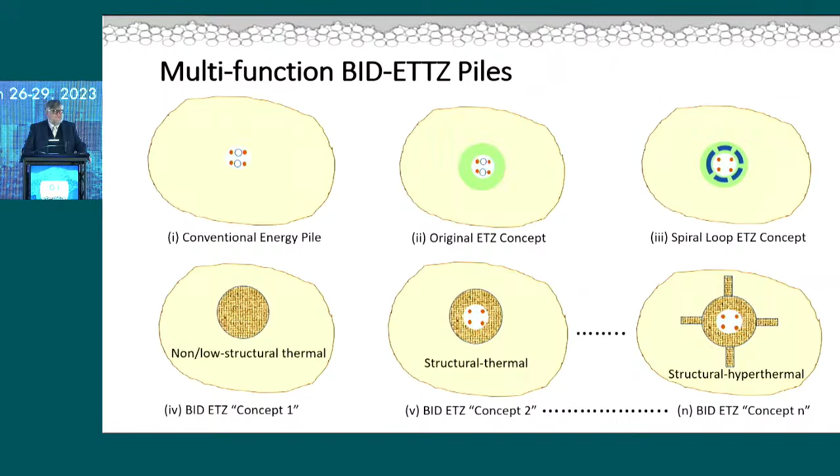So depending on, for example, the bottom right, I'm calling that a structural hyperthermal pile if I really need a higher thermal capacity. So in summary, the properties and performance of both materials at an interface are important, both individually and collectively. The opportunities for interface design innovation are abundant.

We need to be willing to question some of our existing approaches and seek new inspiration that can lead to transformational, not just incremental changes. A test for me at times is: is this going to give me 5%, or 50%, or 100%? I'm much more interested in the 50s and 100s, because that way I think it makes it an easier sale for me when I'm working with industry to convince them of the value.

Certainly something that I think has been missing both in research and practice is questioning how compatibility can improve interface performance, and I think that's a critical factor going forward. We have all the necessary tools - experimental, numerical, visualization - so we're not lacking there. What I've tried to do in this lecture is illustrate this with a couple of examples, but as we say in the face of today's climate change, this is only the tip of the iceberg.

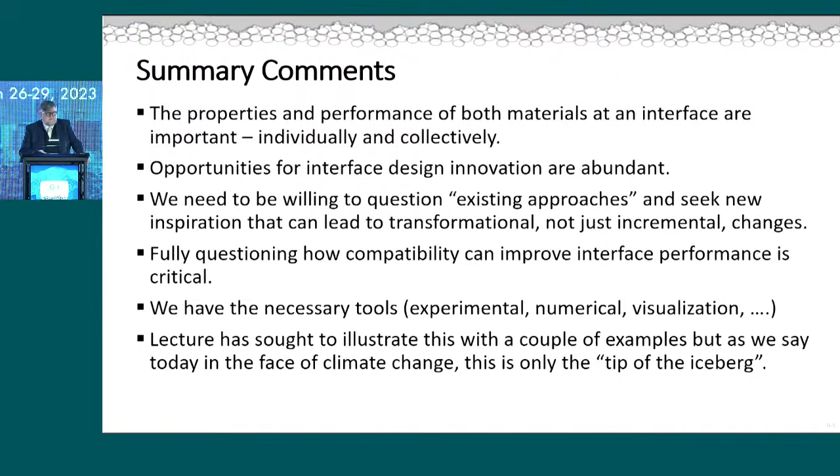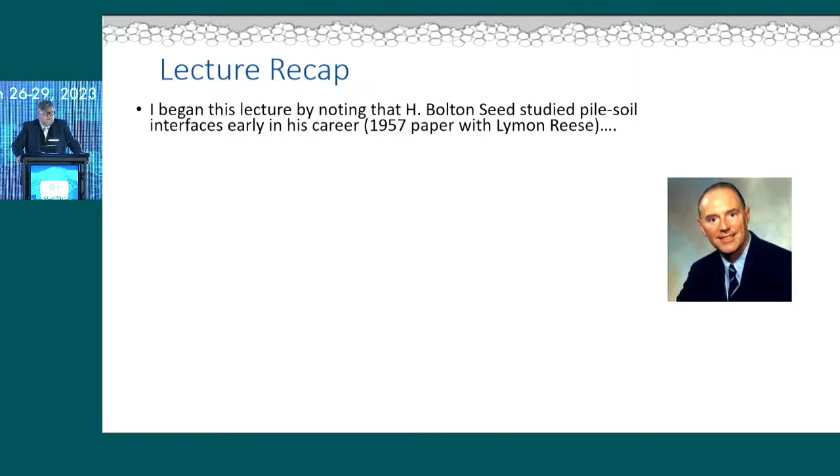So I'm going to leave you with a one-slide recap. I began this lecture by noting that H. Bolton Seed studied pile soil interfaces early in his career. With tongue-in-cheek, I have to tell you, the Alaska earthquake came along in 1964 and distracted Professor Seed for the next 40 years as he created the field of geotechnical earthquake engineering.

There is, I know, a huge number of you in this room who worked with him and benefited from his activities there. Interestingly, however, when you start digging around trying to think about how to tie all this together, I came across a short presentation that his close collaborator and friend, Professor Idriss, gave at the Second International Conference on Geotechnical Earthquake Engineering and Soil Dynamics.

Professor Idriss, in his lecture there, reminded us that in Dr. Seed's 1979 Rankine lecture, he wrote: 'It is extremely important that we take every opportunity that nature provides to continually refine the procedures.' Now, I realize he was talking about earthquakes so that we can refine the procedures, but you see where his mind was going. Nature is a wonderful tester of things that we do. In fact, it's a wonderful source of inspiration.

And so, hopefully, I have filled in some of the gaps linking Professor Seed's early work on interfaces while respecting his vision for the role of nature in what we can do with interfaces. And with that, thank you very much.